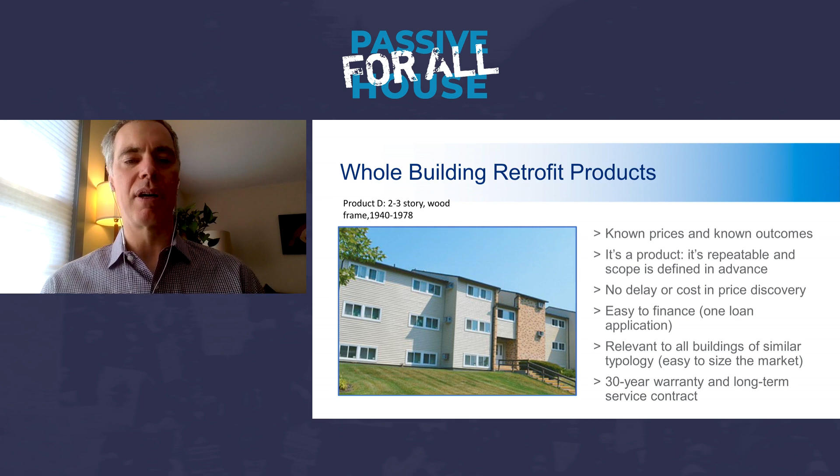So how do we deliver such a product? Let's again start from the end and work backwards. What do we need that can scale a product, a retrofit product like this? We need a zero-energy retrofit company, one that's able to deliver a turnkey product, deliver a warranty, and spend capital to design that product, and be able to warranty it, and even potentially deliver a service contract to it.

The advantages of this type of model are significant cost compression, which is again necessary for scale, and also a company that's able to make replicable outcomes again and again across buildings of the same typology. Another advantage is this type of company can attract investment capital so there's actually an ability to design a product, purchase the necessary technology, and so forth. This is really a key vehicle to having a scalable industry.

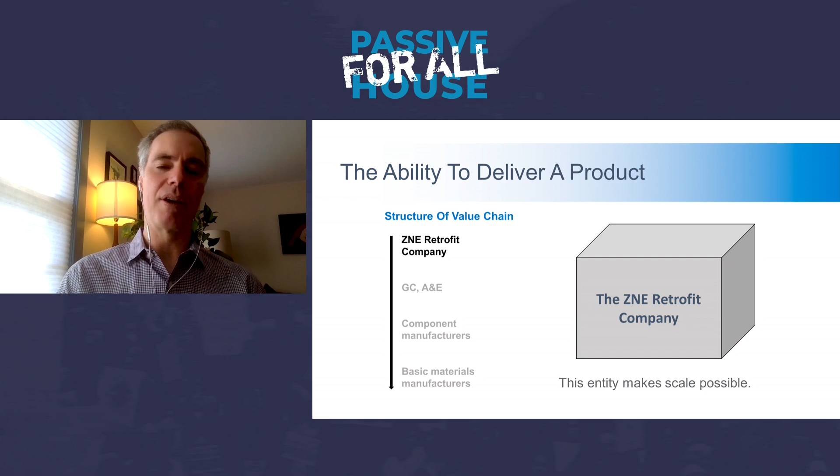So why do we think things are going this way? How do we know this is even a viable approach? When we look at what's going to happen in the next 5 years, we can just look at right now the layer upon layer of technology coming into play, from installation with technologies like Trimble's Site Vision, to financing with apps like Fundrise, to AI-assisted design from companies like MetaBuild, or tenant income models like Spacious.

So from customer acquisition to financing, there's remote customer acquisition tools that can start to filter customers with the right building type, financing technologies that do automatic valuations to reduce underwriting time, building capture technologies that make it easier to make design decisions, AI assist, fabrication and installation software. There are so many technologies out there, and each is finding its way into various aspects of the delivery process. These all promise to help make scale possible and also drive to scale, making it not practical to do otherwise.

Scale really is about access. A net zero energy building is an amazing technological achievement, but one building doesn't solve our problems. We really need to see how to vastly increase the degree to which we can implement it.

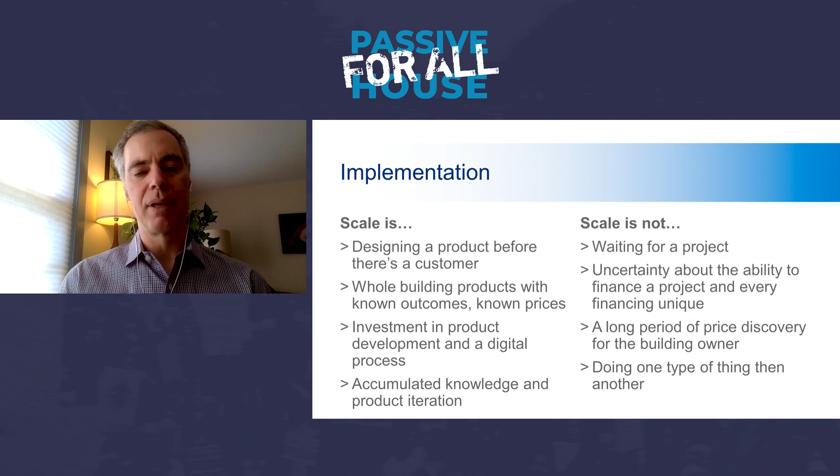It's not about uncertainty about the ability to finance or waiting a long time for financing to come into play. It's about accumulation of knowledge—not doing a hospital and then doing a library without aggregating that knowledge and learning within the team, but instead really applying that accumulated knowledge in each iteration.

When we think about what's going to happen in the future, obviously we can't predict it, but it's wise to think about the most likely scenarios. Every time we make a decision, we're making a prediction of the future. A decision is a prediction. So when you order a piece of cake instead of a piece of pie, you're basically making a prediction that the piece of cake is going to taste better than the pie or make you happier.

So we need to make predictions about what's going to be most effective, what's going to increase our odds of success, make us happier. When we craft scenarios and collect research to inform our view of what the future will be and what those most likely scenarios are, we can look at the R&D pipelines, the business models, the unmet needs of building owners, and the rapid changes in adjacent markets. All these things point to pretty significant drivers of change.

Since I've personally looked at a bunch of R&D pipelines, I can tell you there are some amazing technologies coming out that individually can make pretty substantial changes in this market. But when you put them all together, it has potentially a pretty profound impact.

The same goes for business models. We're seeing a lot of them, like Onion Flats' developer-designer model, and the unmet needs of building owners, like the increase of insurance costs, flood risk, or carbon penalties. These all come into play and are the type of things that really move markets and point to scale as a necessary thing to adopt and think about as we make daily decisions.

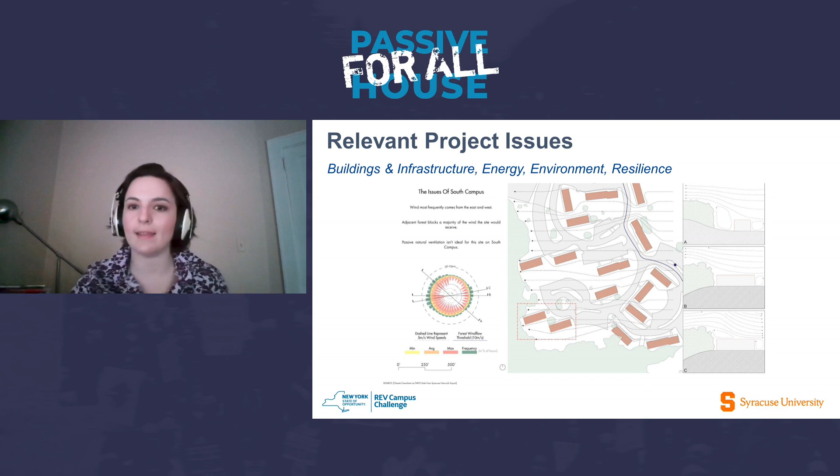In these bar buildings enclosed by this red rectangle, each has 8 units. When we cut crossways through this block and look in, what we're seeing is really not a good condition for natural ventilation and fresh air to get through. This analysis was another drawing from our lab.

One of these openings on the ground floor is actually the front door, so we can assume there's no ventilation coming through there because we wouldn't have that open during operation of the building. You can see there's a lot of dependency on single-side ventilation, and there are no active ventilation systems in this building.

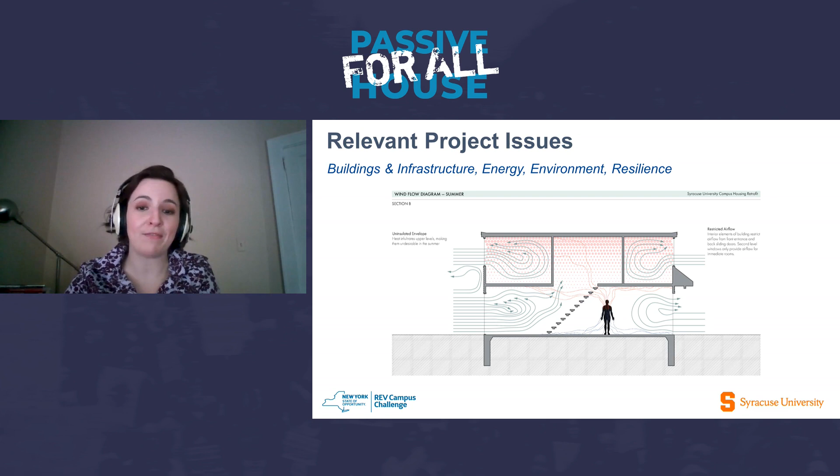This is one of our priorities to think about for our context and for a lot of these buildings that didn't have air conditioning or any kind of forced ventilation installed: this lack of fresh air and how to approach it—is it ERVs, what is it? We have access to good fresh air, but it's kind of hard to get it in there. And of course, in a retrofit we can't reconfigure the interior and still call it replicable, because that also gets quite expensive.

Our analysis starts to make sense when we see why all of our sensors, which have been taking data for about the last 4 months now, are showing really high CO2 levels. We have high total VOC levels, up to 4 times higher than acceptable levels. This is really problematic, and it ties into our considerations around the idea of the triple bottom line, which we might remember from the 90s when we started having these conversations about sustainability.

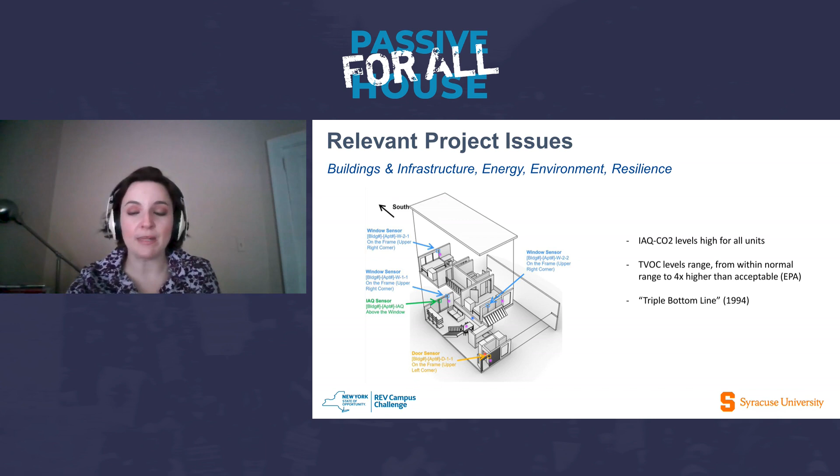It was the kind of people, profit, planet. But for us, the people aspect is not merely social, it's really extending into the human health and wellness aspect of what we're calling the total value proposition. The next step is to posit that we can have better design with better quality materials, improved indoor air quality.

And we can make it financially feasible. So to expand on that, we're looking also at life cycle assessment as a method of evaluation. This being a retrofit, it's coupled with research, student engagement, and public outreach and education, so we're charged with looking at the bigger picture. If we're thinking about this as a demonstration for potentially many thousands of buildings, we have to be conscious of what materials and systems we're using.

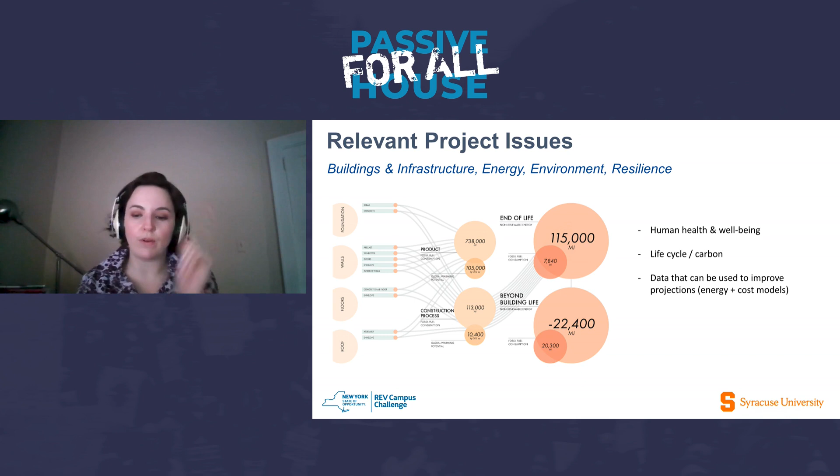Where do they come from? What do they do operationally while we use them? And what happens to them after the useful life of the building? We want to showcase, to the degree possible, newly commercialized products and materials. And finally, we want to improve our projections and models with post-occupancy evaluation for a full year.

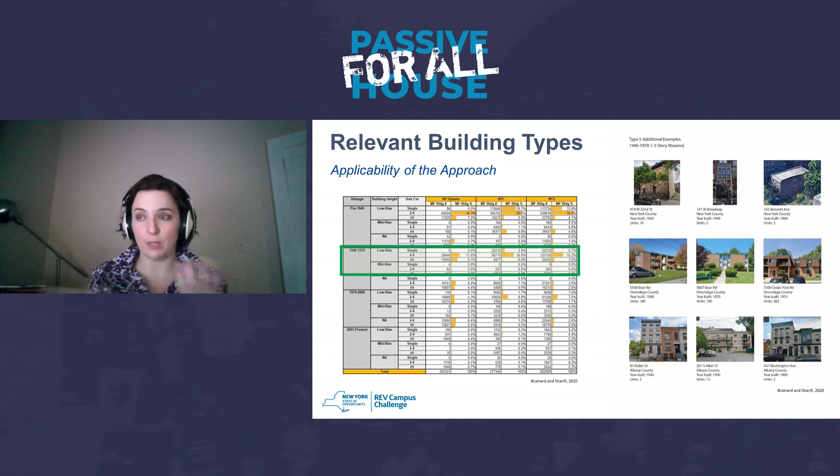There are similarities that certain approaches can share, depending on how we define approach. So there could be a family of approaches that could extend to those pre-war buildings as well. Then you go from about 20% of the market in the green box to over 60% when you include that pre-war segment.

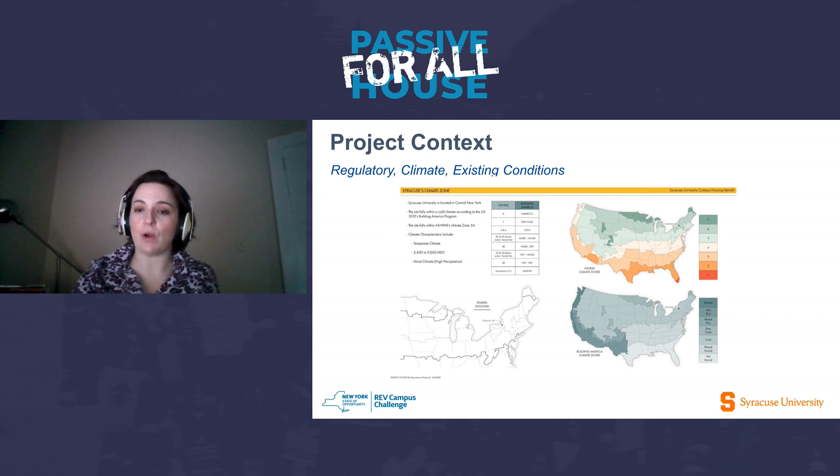Moving on to our project context, our project aims to align with New York State decarbonization goals, electrification, using materials to the extent possible that are non-fossil fuel derived. We've got a cold climate in Syracuse, New York, and climate is a key factor, as well as humidity—temperature and humidity are aspects of climate that are really key to developing exterior envelope solutions. However, there are a lot of cold or very cold climates in the United States, so we're hoping that at least threads of what we develop can be used elsewhere.

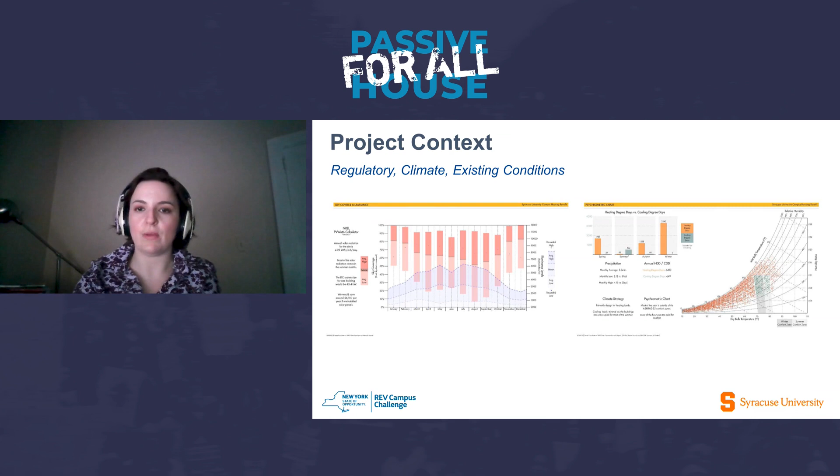Other activities in terms of analysis and considerations: we're analyzing the feasibility of solar, looking again at our climate, which is predominantly space heating here in Syracuse. In addition, we're trying to build out a database that maps existing and ongoing projects and component manufacturers as a landscape, as that rapidly evolves.

This is crucial to scaling the idea of available materials and systems, particularly those local to the United States. If we're looking at life cycle, we want to encourage Northeastern and United States manufacturing. Eventually we're thinking this might become a market research database that we collaborate with government and real estate entities to develop down the line.

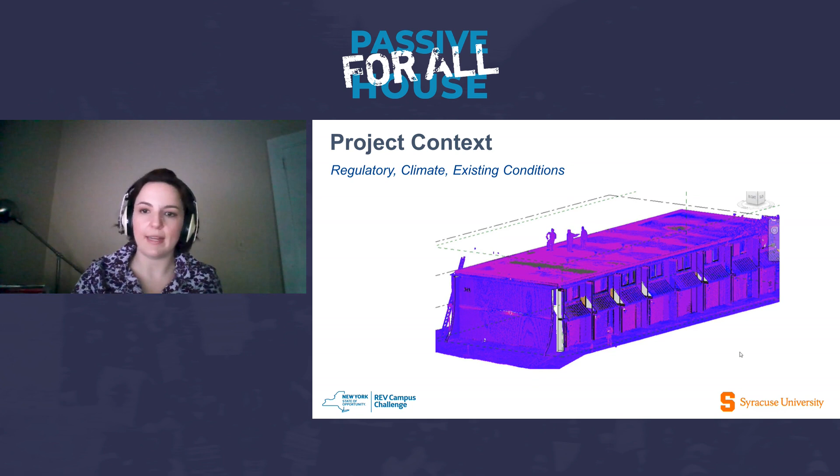Every building has its own idiosyncrasies. Ours is going to require some abatement - there's some asbestos joint compound, PCBs in the windows, et cetera. So we've got to strategize approaches. I don't think this is limited to just our campus; I'd venture to say this is an issue happening elsewhere as well. So this is a clear challenge for us, especially if we're considering things like retrofit in place.

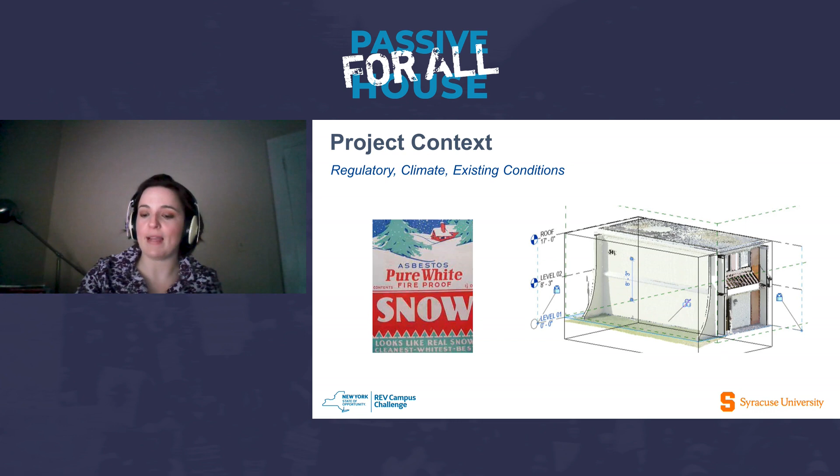Also, if you're considering prefabricated approaches, just having a 3D scan of the building - for us this took about 20 minutes for a 6,000 square foot building - allows us to have much more accurate as-built in terms of the model. That's really essential for prefabricated solutions.

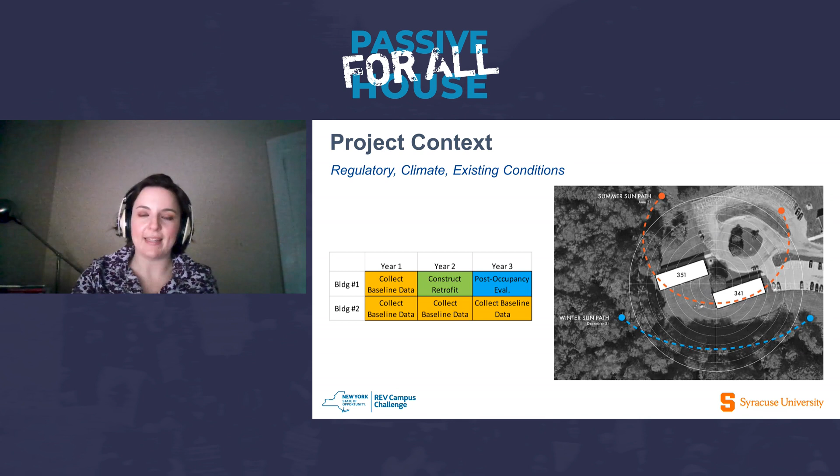And then finally, we chose our test building because it's located adjacent to an identical building with the same orientation. So the idea is that we collect data, we construct our retrofit, we keep taking data, and we do a year post-occupancy evaluation, and we keep taking data. So it's quite an opportunity for us - very rarely in architecture do we get the opportunity for a control in our experiment.

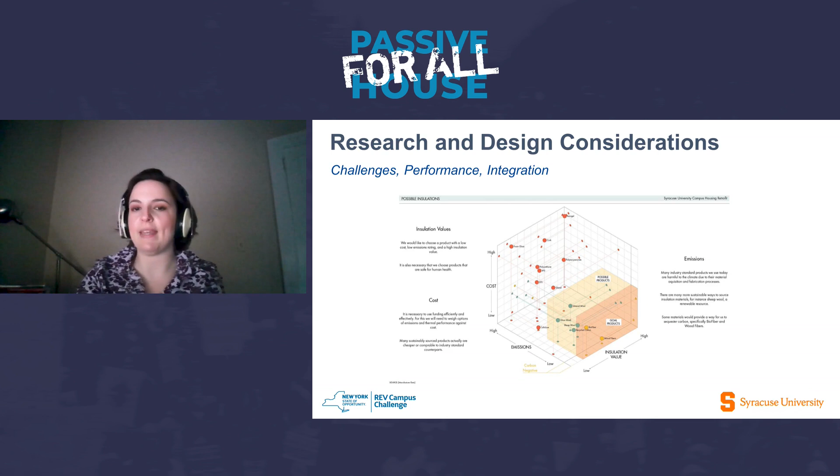And then we're considering what are some of the possible criteria in design that inform the way we make decisions regarding specification of systems. So this is all contributing to some of the background research for us.

And the way we're defining performance of our materials and systems, we're looking to Passive House for guidance on our path to net zero retrofit. The building physics principles don't change - thermal insulation, air tightness, minimizing thermal bridging - so we're going to have to find some creative ways around that.

But we want to gain a better understanding of which of the measures are doing which of the work. We can say tentatively that the envelope is doing quite a lot of the work, but then it comes down to the systems as well.

So we're using energy modeling, optimizing across cost, across comfort - visual, thermal comfort, et cetera - and we can map that to the budget over time and determine what we really need.

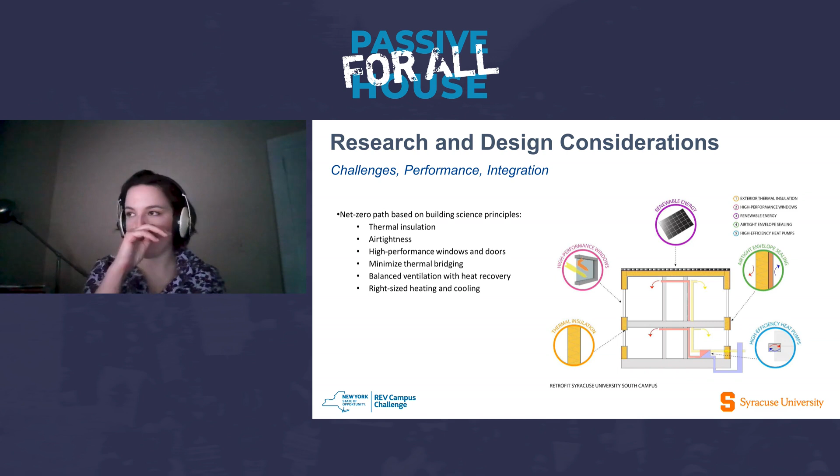And then finally, the question is what is replicable, and what aspects of design, production of components, construction can be applied to other buildings within this type. Being part of one type based on vintage construction and height gives us an idea of thermal performance and what to expect from the construction of these walls based on the standards at the time. But it doesn't necessarily translate into a mass producible material size, panel size, or assembly-based approach, so it's important that we, at least for our context, really define what that means.

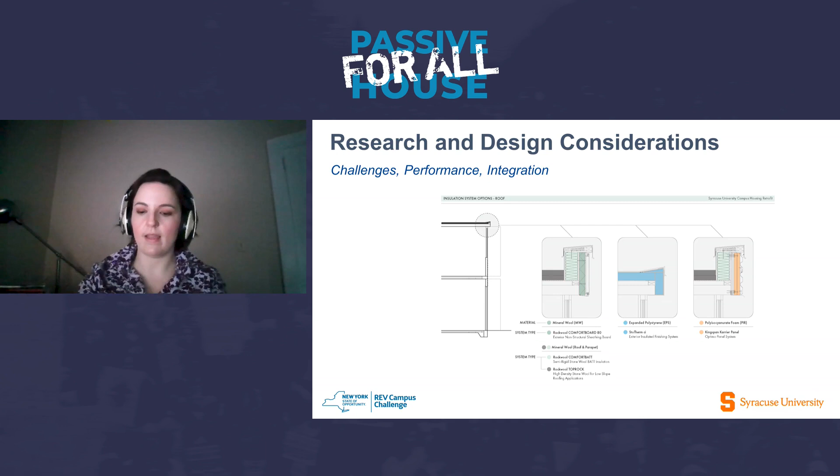And then down to the detail level, we have a lot of options that exist with these kind of baked-in trade-offs that tie into everything from the appearance, the aesthetics, the cost, the culture, and so forth. So we're trying to build up that detail library.

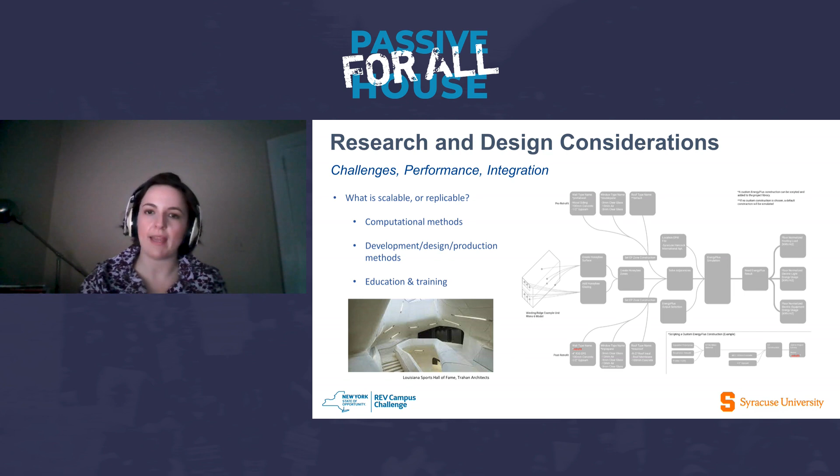We can say conservatively, since we're very early in the process of testing, that computational methods - there are some remnants of mass customization, mass production, development, design, and production methods, prefabrication, correct installation. In terms of education and training, this is so crucial and often a source for a lot of energy loss and energy inefficiency - so well-designed connections. And again, I want to emphasize post-occupancy evaluation to get better data and better models.

We know prefabrication can reduce material waste by 30%. That's pretty significant given the 300 million tons that the US produces each year, 40 to 50% of which is C&D - construction and demolition waste. So that's really quite a lot. This will be one of our topics of study for this project, to look at the estimated waste saved on the project and share that information with solution providers.

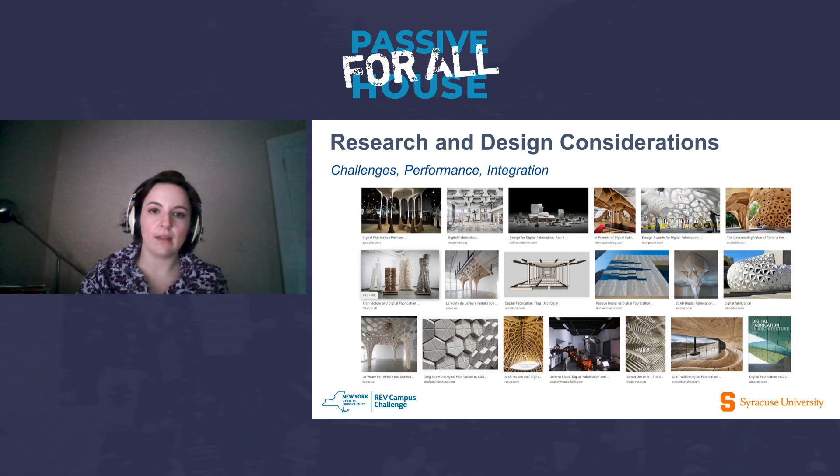So enabling technologies in mass customization, like BIM, allow us to model every piece and part in the system, as well as measure the existing condition and produce something that fits well in the space. This can absolutely scale as an approach.

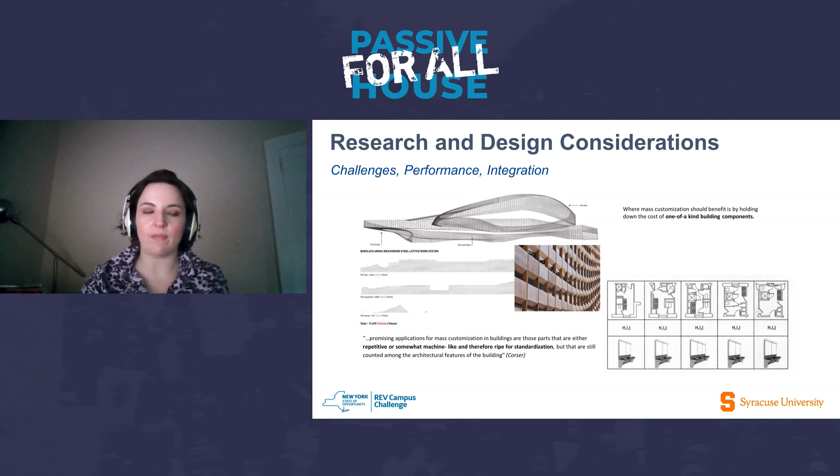As in the SHoP project for the Barclays Center, there were 11,500 unique panels on that facade, or the KieranTimberlake bathrooms at Yale University, shown on the lower right. There wasn't one unit, but a family of units that could fit into different spaces.

We want to look at the potential for mass customization, which is often criticized as being devoid of culture, and begin to depart from that by understanding the market and the idiosyncrasies of the building stock, considering emerging technologies that can satisfy groups like preservation—potentially using 3D printing or hybrid low carbon materials as lightweight replacements for elaborate stones in Brooklyn, for example. It's a rapidly evolving ecosystem of technology, products, and ways of thinking about design and production.

In addition, I think the integration of data into our methodologies, on a scale that's unprecedented, can really contribute to improved retrofit approaches.

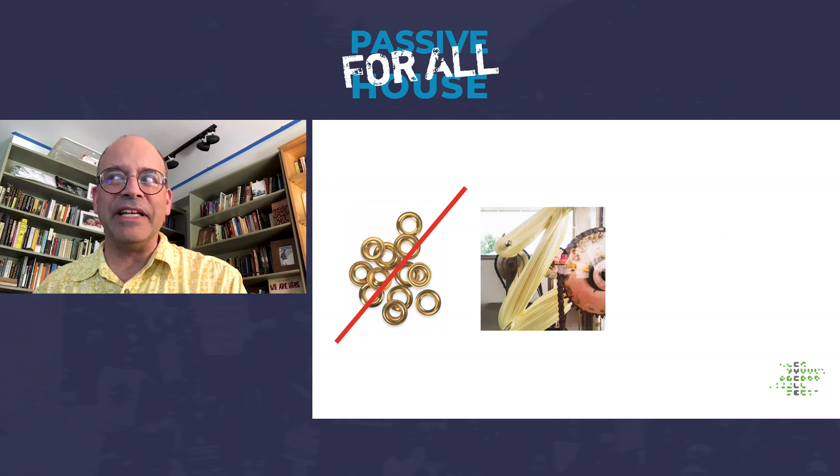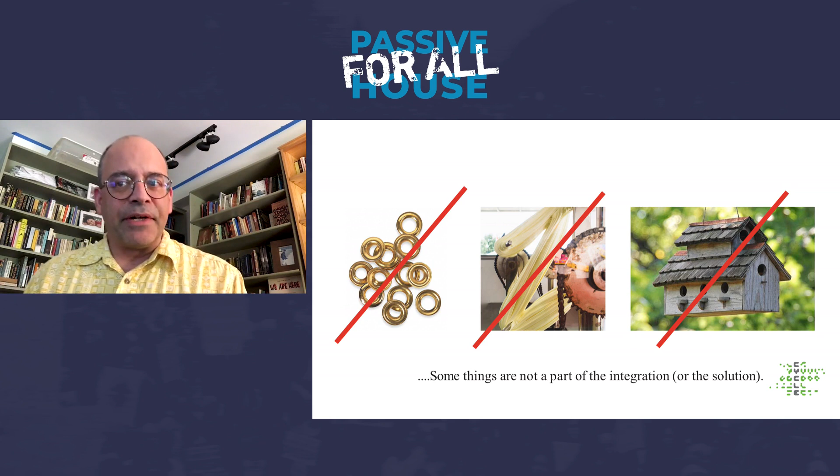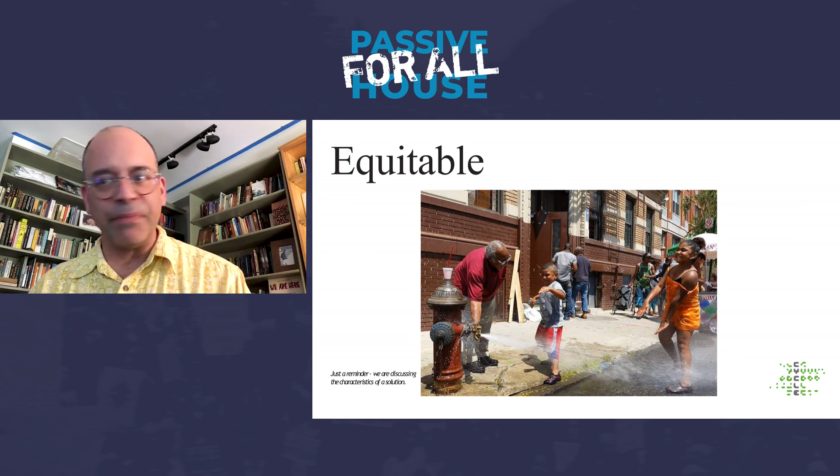Another characteristic of a deep energy retrofit is that it's an equitable solution to living in urban spaces. Imagine a zoomed-in close-up of that overall view I opened the show with—every one of those buildings has its own culture, its own residents. It's part of a streetscape. Multiple generations live there. There are things about retrofits inherently that are equitable, but we also have to bear this in mind when we design our solution.

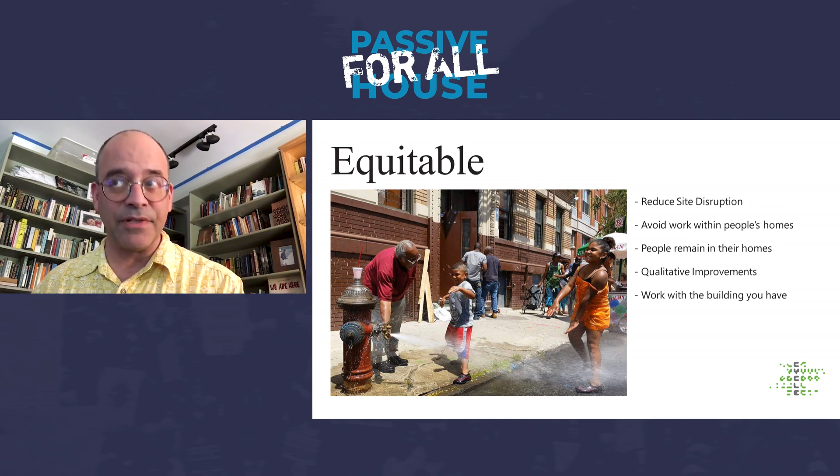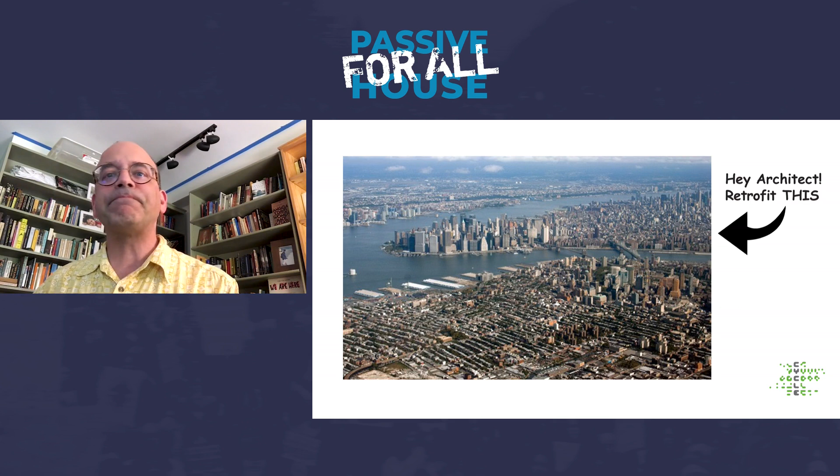So let's move on now to integration. As designers, we're used to seeing every opportunity as a blue sky. But a retrofit solution forces us to consider that we're not looking at a blue sky at all, but maybe the outline of something that's already pretty well defined.

Through her work that she just presented, Nina is working on defining exactly what you have to address with the retrofit and what the issues are, and we see them across all of the various typologies. But the closer we get to a solution, the more some of these integrations start to become clear. One important principle of integration is that for a solution, there's really only one integration, only one solution per typology. Now, I'm not saying that everybody providing a solution for that typology has to have the same solution—that's what the market is there for. But there's only one solution that you, as a provider or designer, can provide.

If we're going to achieve the kind of scale that James is talking about at the outset, we're no longer blue sky designers. We are implementing a solution which has already been figured out. This is what I mean by that.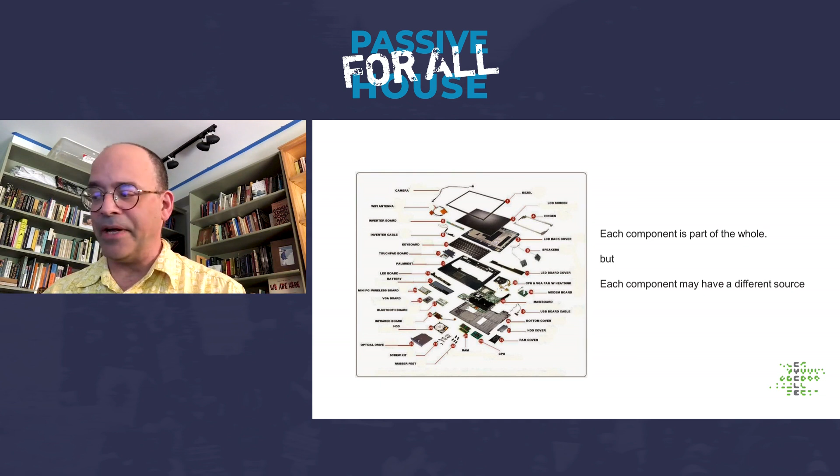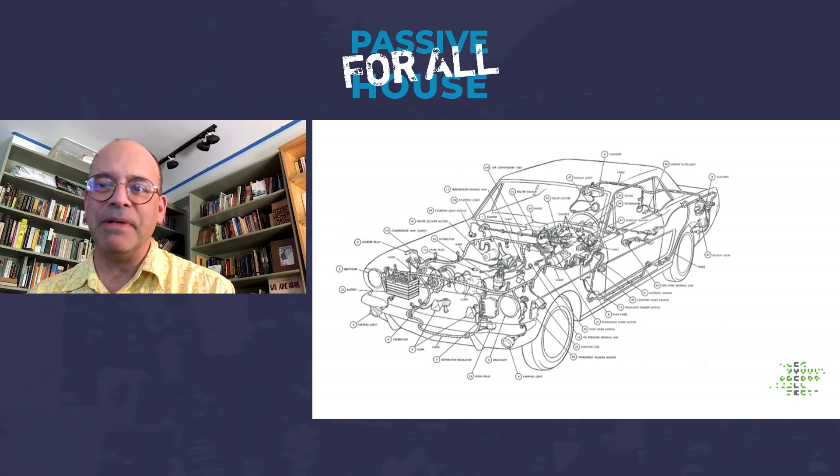You're buying the computer. Likewise, we would see this as a solution when it comes to doing deep energy retrofits. Here's another fairly well-known component that is a solution for driving on roads. It might not be the only solution in the future, but it's certainly one. And I guess we can take comfort, as architects and designers, in the fact that when you go to buy a car, you have a very wide variety of choices. So while I said there can only be one solution, I'll amend that and say there can be many models of that solution—you can have a little bit of variation in performance, appearance, cost, et cetera.

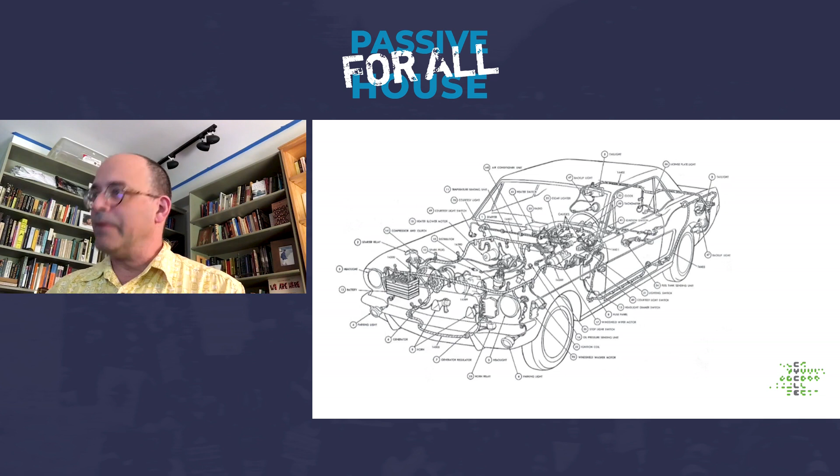So now let's turn our attention to some of the details. I'll share some details that we've been thinking about for some of the work we have been doing. We are looking at doing panelized exterior cladding solutions for buildings, and in this case the idea is really to integrate as much as possible into this exterior cladding system. We want to integrate a window, a heat pump, an energy recovery ventilator, and any sort of supporting conduit and piping. All of this can be integrated more or less into this exterior panelized cladding system in some way. There are other ways of doing it, but we don't think they're as promising as a solution.

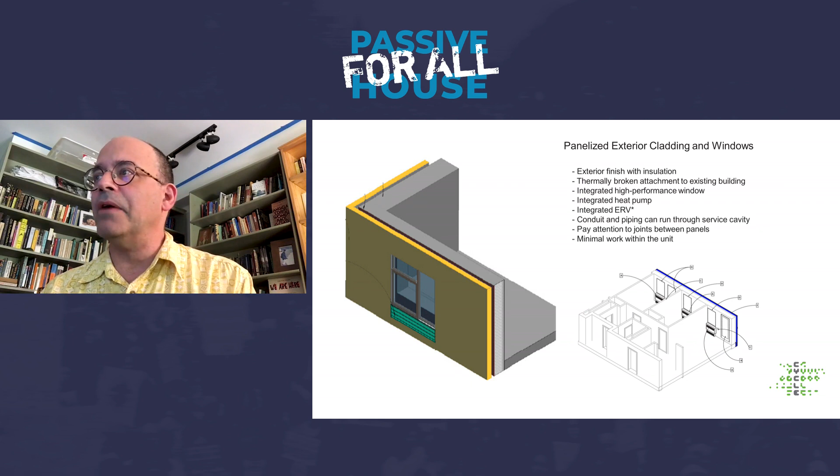Let's take a little closer look at the detail here. A solution really is going to rely as much as possible on what's given by the building. So we look at taking down the sill maybe by a little bit, or using the existing window opening for the integration of our mechanical equipment.

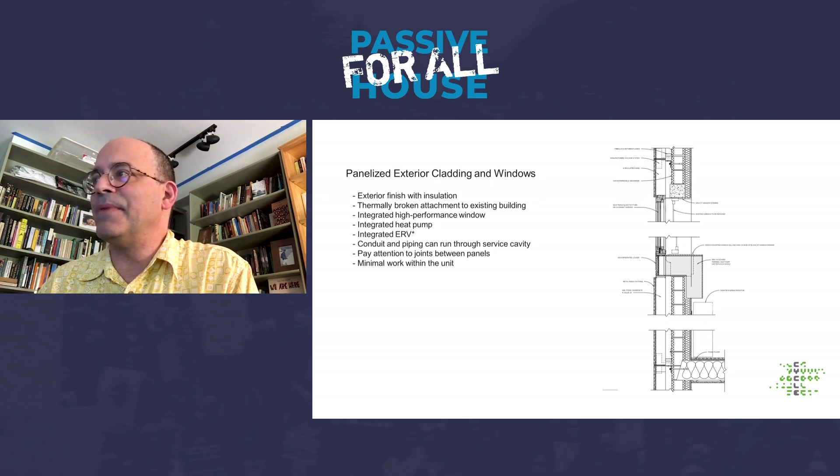There are some other considerations, obviously. We have to make some kind of anchor attachment to the building. We have to remove the existing window, of course, and provide some kind of interior trim solution around that. But by and large, we're trying to eliminate as much work in the balance of the building as we possibly can, because we want to keep the building occupied.

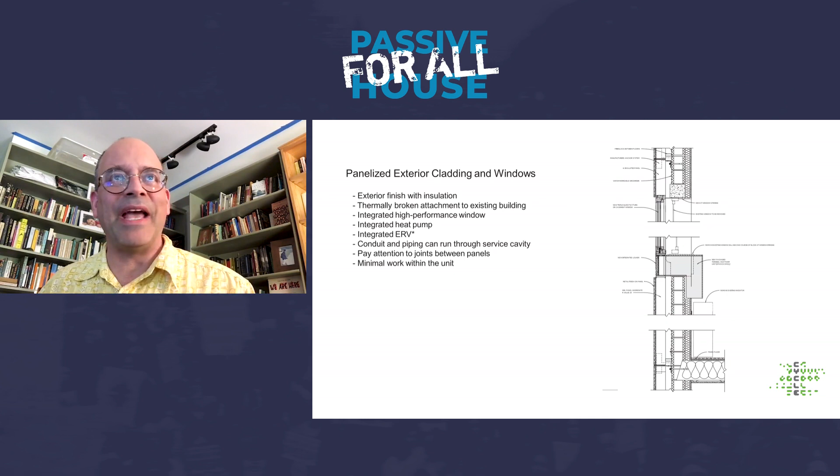So that's going to require a little bit of specialization to reach that aspirational goal of just integrating everything into the panel.

First thing, packaged heat pump units. These units are on the market in Europe, and they're coming to market here. They've been tested and certified. You can see very compact physical form for the unit. It has an exhaust out the back, and we are proposing to integrate that exhaust into a plenum that goes out through a louver, which is integrated into the design of the window.

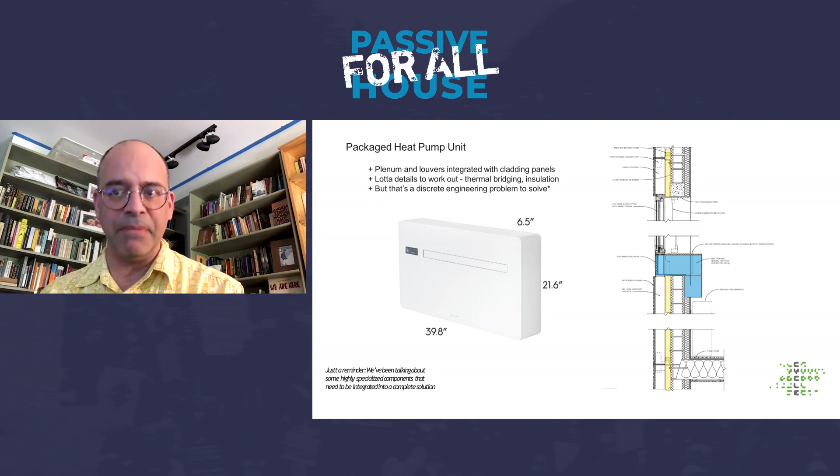Basically, we could have a separate louver in the panel, but for our purposes, we thought this would be a little bit advantageous in the detailing, since window manufacturers generally already have details for incorporating louvers and vents into their windows. But still, a lot to work out. But it's a discrete engineering challenge that can be met. It's not a conceptual challenge.

Likewise, attaching to the building. Usually a panelized system is going to have most of the insulation on the outside, and there won't be a lot of thermal bridge. But exterior panels are structural, and they have to be supported from the building structure. So there is actually, at every point of attachment, some kind of a thermal bridge.

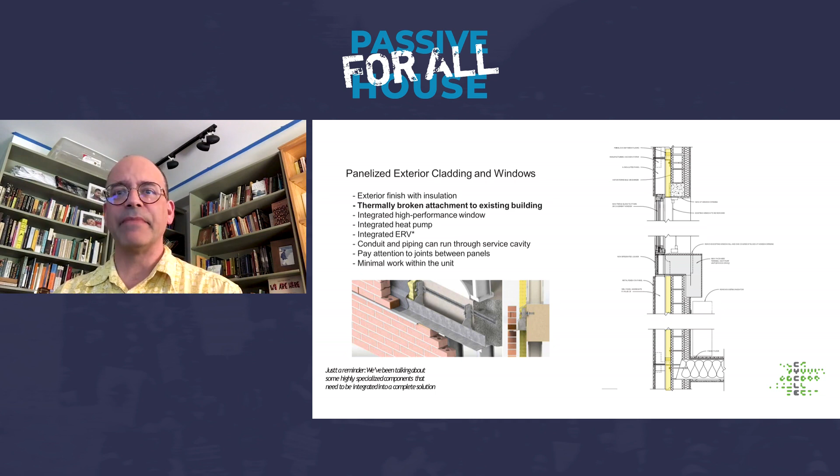So, energy recovery, again, we're looking at solutions that go through the facade, rather than having complex systems of ductwork on the exterior of buildings, or worse, on the interior of buildings. There's the Lunos type, where you have a paired ERVs that just go simply right through the wall. And there are some European single module solutions as well.

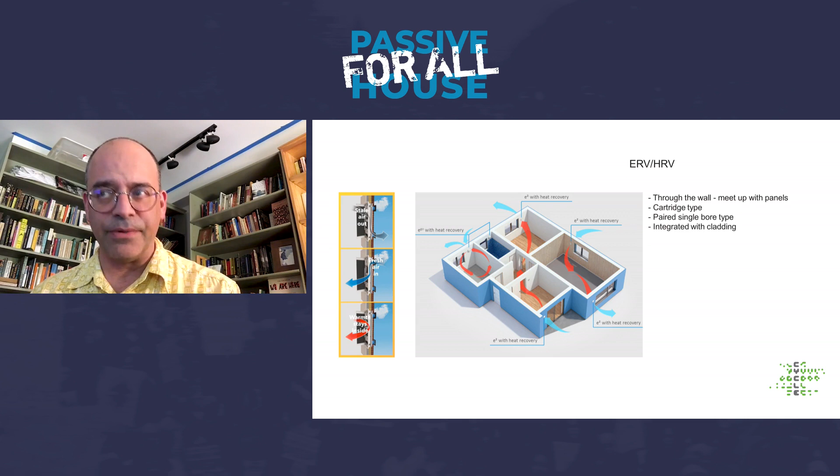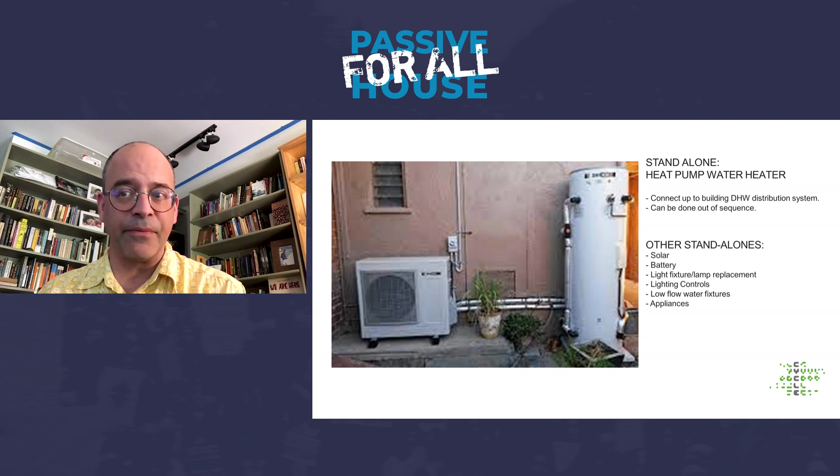There are a number of pieces to a deep energy retrofit that are standalone. You can see them listed here: solar, battery, et cetera. They just stand alone. Perhaps the biggest and most impactful of these is changing out a building's domestic hot water system for electric heat pumps. It's an example of that there.

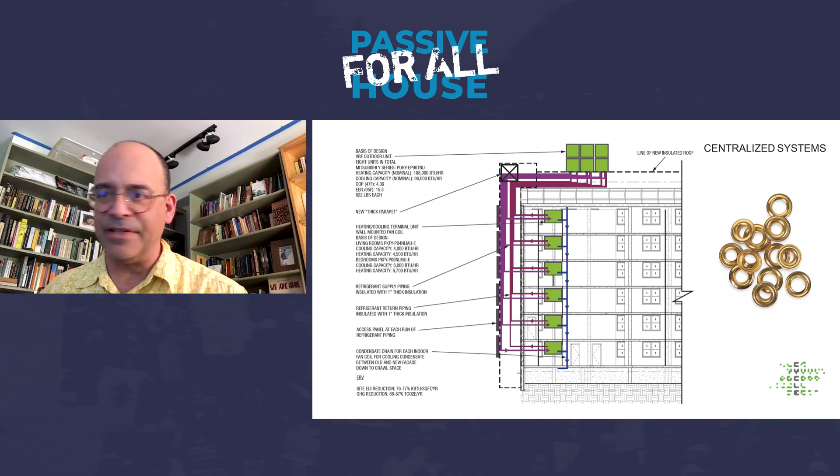So what's not in it? What's not in the burger? Where are the grommets? What's not integrated? Centralized systems. Again, rooftop mounted VRF type systems have refrigerant piping that's got to be somehow integrated and run to the interior of every unit, uses refrigerants that are ozone depleting and will probably have to be abandoned in place. You just can't change out the refrigerant. We prefer package systems, and I think the diagram shows it.

I'd like to close by offering a few words about the aesthetics of these kinds of panelized systems. We are generally talking about making flat panels to enclose buildings. That's the simplest, the cheapest, the easiest thing to do. But just because it's flat doesn't mean it has to be dull or devoid of culture.

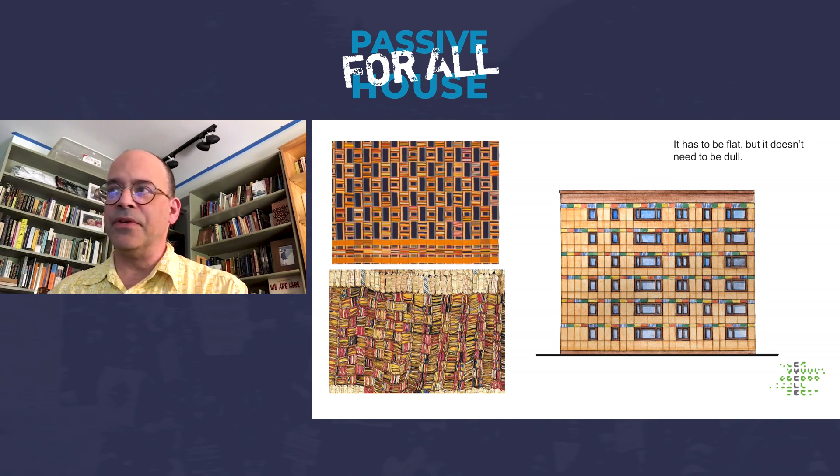You can use fabric as an example. And there are all kinds of patterns, pixelations, color palettes. All of these elements can make up a part of a solution, and there still is plenty to be challenged by with each individual building. It's just there are places where you can do it, and places where it just doesn't make so much sense.

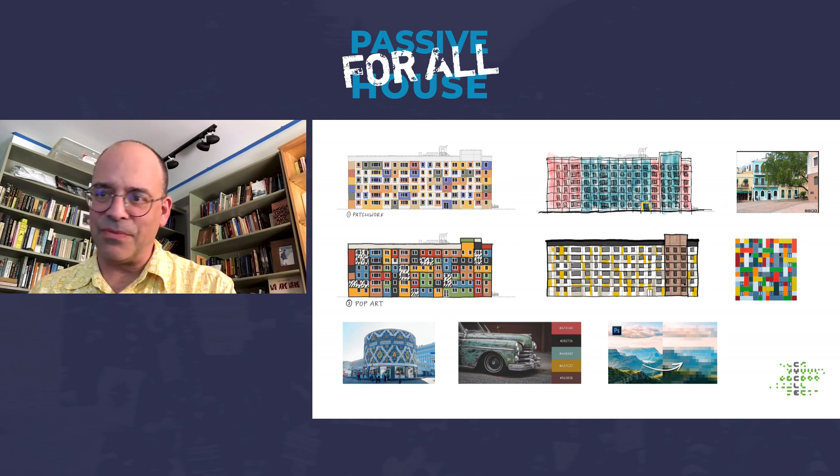So, finally, I have one last thought before I close. Obviously, regulations are going to bear a lot on any potential solution. Often we have conditions where if you want to enclose a building, there is an encroachment over a street line or a lot line or into required open space or yards.

Fortunately, at least in New York City, the Department of Buildings has been looking into this for the next round of code revisions. And June 14th, a Monday, there's going to be a public hearing. I encourage anyone who's interested to tune in or to actually try and participate. You have to get your comments in quick, but there's still a way to participate.

Basically, the building code is going to be revised to allow encroachment past the street line. This is huge. It means a lot of buildings that might not be able to be retrofit will be able to be retrofit. However, there are some catches. They're going to allow 8 inches encroachment, 10 in some circumstances, and 12 in some circumstances when you get special permission.